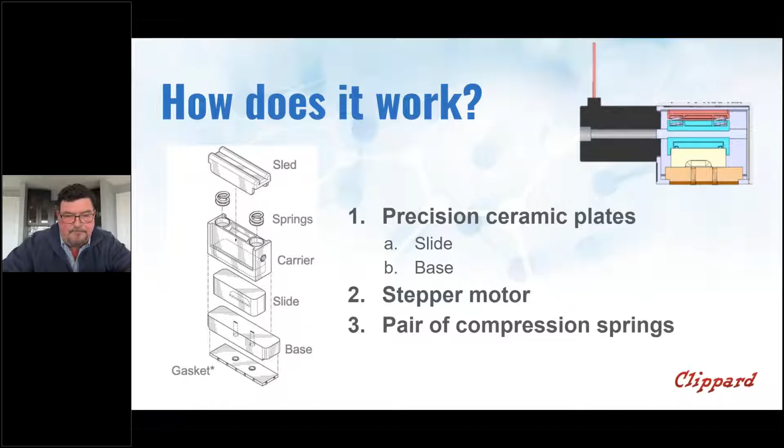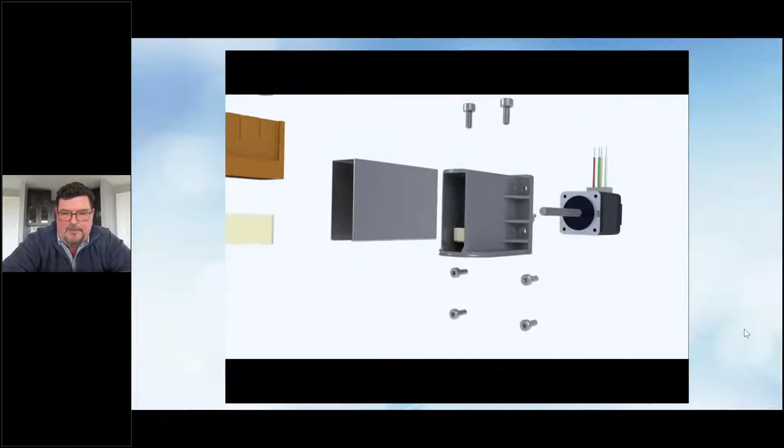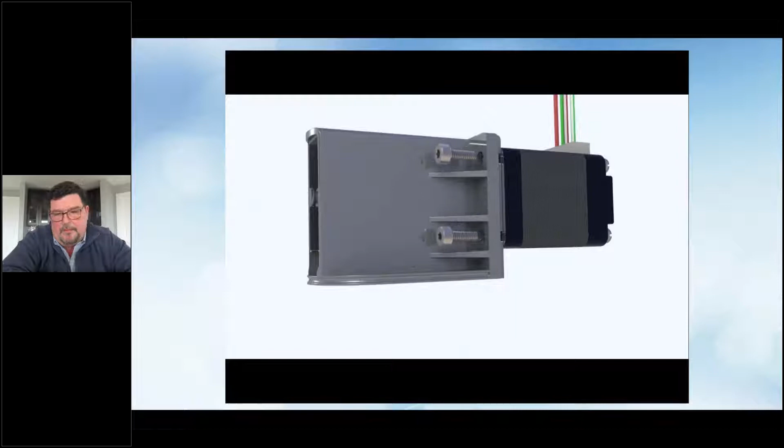Here's a short little video of basically how the Eclipse goes together. As you can see, we have the two ceramic plates. The base plate will be sat in and fitted in, and then the stepper motor will come in and actually attach to the carrier assembly. That carrier assembly, or the nut, would be actually holding the upper slide, and then we'll hold the compression springs in there and have a nice little fit into the overall housing.

So what's happening inside? We have a product that's called the SCPV, and that is a stepper-driven needle valve. In this case, this is a stepper-driven variable aperture valve. Basically, I am varying the size of an orifice based on these sliding seals. As you can see on the isometric view to the left, the plates are in the home position, fully closed. And as I said, you could use A or B port as your supply, but in this case, yellow is going to be our supply.

Now as I go into the overview, number one is the same picture as the isometric view to the left, but now I move into number two, and I'm starting to give the motor a command. I'm actually starting to step out and move. And the great thing about our flow paths, they have rounded ends. And so as I'm transitioning across the plate, the two rounded edges start to overlap or eclipse.

And so now I'm able to, in a nonlinear fashion, vary the delivery of the gas or the fluid into the circuit or downstream control environment. That's a nice little soft start option. And as we get further into this, you'll see that you're able to control the rate of that soft start. As we move further into the rectangular section of the flow path, we get into a more linear flow control of the output flow until we get to a fully open position.

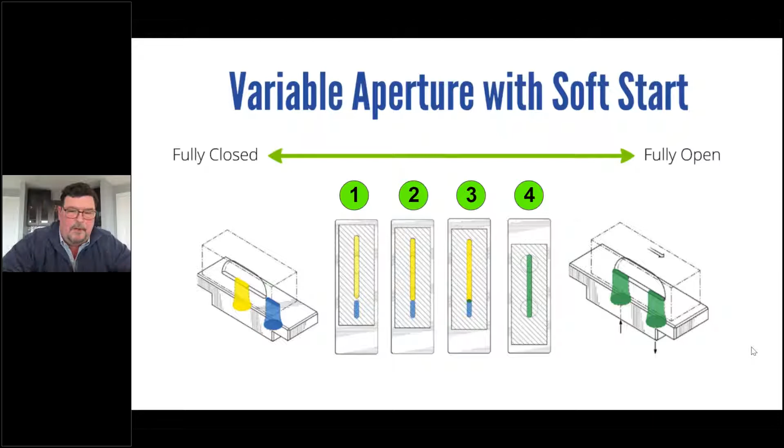So the Eclipse stepper motor is a bipolar hybrid stepper motor. It's kind of like a brushless DC motor, but instead of continually rotating, the revolution is divided into an equal number of discrete steps. This motor is actually capable of doing 200 steps per revolution. We chose the Haydon Kerk size NEMA 8, and this motor gives us a 1.8 degree step angle.

And by going this route, we're able to provide 60 millionths of an inch position change per step. Now that's in full step mode, and we'll get into what we can do micro-stepping wise, but in full step mode, each step will provide 60 millionths of an inch incremental change. As you can see to the right, the way the motor works is I'm energizing and de-energizing magnets to create a rotation internally, to the point where I'm able to make position changes of 60 millionths or better.

To make this Eclipse work, I need to have two components. I need to have a bipolar chopper driver. Our SCPVD-1 is something that we offer as a convenience. It's going to take the signal and chop the information to the motor, but I need to be able to give the motor a command, so I need the PLC as well. I'm pulse width modulating a 5 volt signal, and I'm going to need both of these to make it work.

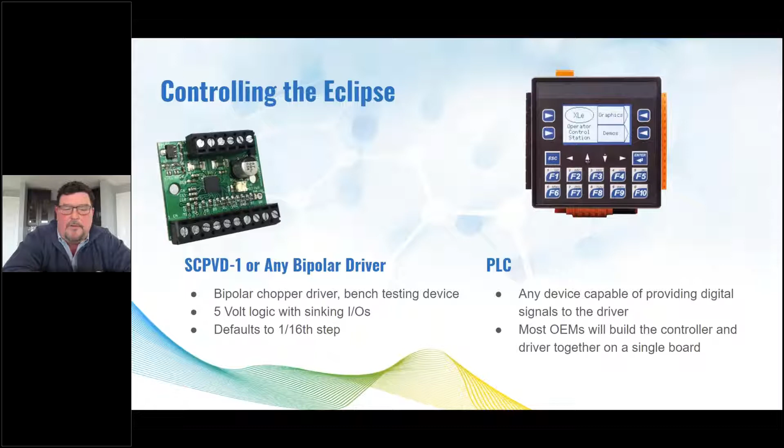But we offer the bipolar chopper driver as a convenience simply because we know that you want to get the Eclipse and do the testing, but this is something we know you're going to design into your application. Typically, it's a lot less cost for you if you just design your own chopper driver when you're putting this into equipment that you're going to produce.

So what makes the Eclipse unique? The 4 things we'll talk about. The first one's soft start. Second one would be resolution. Third would be the flow path, and fourth would be the ceramics.

The soft start, I have a lot of familiarity with what goes on because of the different products that we manufacture. Here we have a straight line that we need to follow, and we manufacture 2 other products, the EVP and the DVP proportional solenoid valves. And when I'm working with those type of valves, I can get very good control. The more current that I apply to the valve, the more of an output flow I can control.

But because of the dynamics of that product, I'm putting current to the solenoid. I'm generating enough current inside so that I can have enough magnetic pull to pull my spring mechanism or my seal mechanism off the nozzle. When I do that, in a lot of sensitive applications, that jump or that initial momentum off of the nozzle creates some type of jump in your pressure or in your flow. And in a lot of applications, you can't have that.

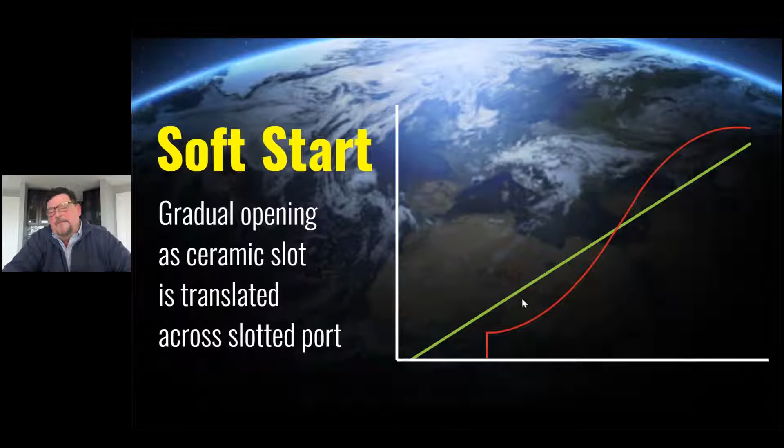So I'm very familiar with this section of the control of a proportional solenoid valve, and the soft start for the Eclipse. Well, because of the rounded edges of our flow paths, as you can see, we're actually overlapping, and we're truly eclipsing that flow path. We're able to vary that flow path at what rate you want to go with, and then it automatically gives you a very soft start, a soft introduction into the system downstream.

So next, we're going to talk about the UltraFine Resolution. I've already told you that the 1.8 degree step angle allows for each step to be 60 millionths of an inch incremental position change in full step mode. But now we need to talk about that we can actually micro step this. So I'm in full step, but I can micro step this down from full step to half step to quarter step, 8th step, and then a 16th step. And by going to the 16th step, we're able to tell you about this ungodly number of 3.75 millionths of an inch controllable. Well, I'll put it in a different perspective for you.

When we're microstepping, the Eclipse has an effective orifice of 20 thousandths, and I'm giving you in a full step 1,125 steps to modulate that 20 thousandths orifice. I go into a 16th step, and I'm varying the effective orifice of 20 thousandths, but now I'm giving you 18,000 steps to modulate that orifice. That is some very fine, ultra-fine resolution.

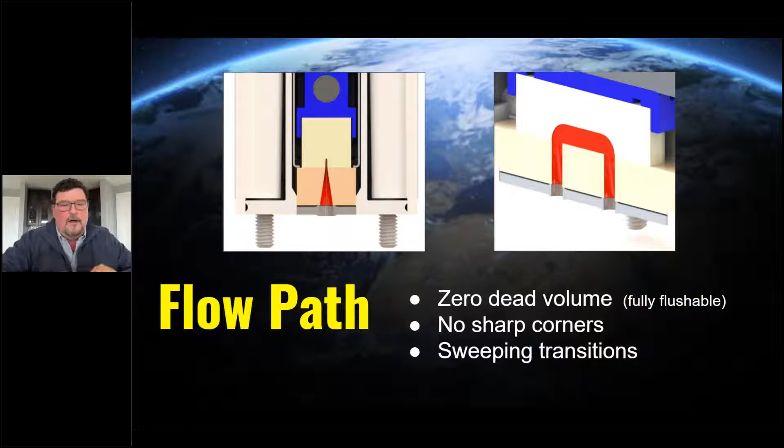Next is ceramics. First of all, it is ceramic, and it's an inert material, so it can work with a tremendous amount of different gases and fluids. The amount of time and effort that went into figuring out the precision molding and the geometry of the flow paths is basically what makes this a very smooth product for you. The lapped surface finish, we're sliding across the surface, so obviously that's going to be a concern when we're working with different fluids. What kind of life can we get out of this? And so a lot of design work went into figuring out the right makeup of the ceramic plates.

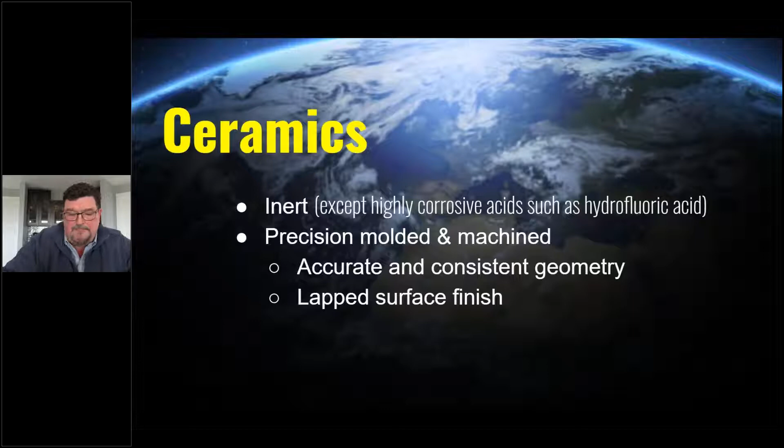Here's a little video that's going to cover just some basic operations of the Eclipse.

I think, Rachel, are you going to put that on? I don't have access to that video. Guess not.

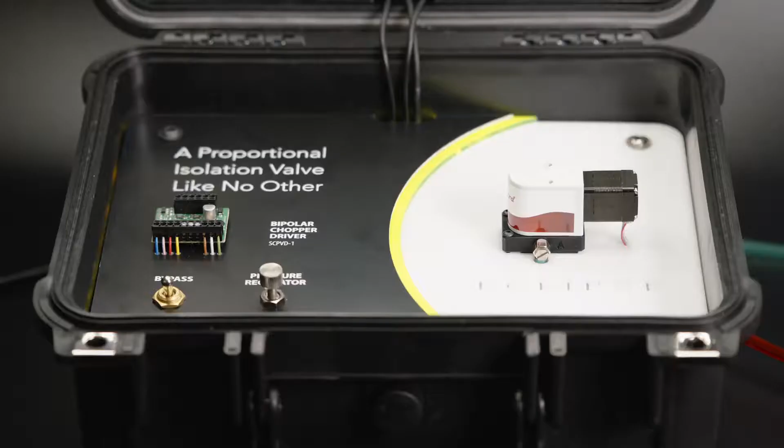Here at Clippard, we've created this really cool demo. It's a user-friendly type of demo for our Eclipse, and it basically utilizes our driver board, our regulator, the Eclipse, and a nice touchscreen. I start in full mode with 30 psi as my supply, and all I'm really doing is generating a curve from fully closed to fully open in the different microstep modes.

As you can see, the demo automatically rescales the graph to accommodate which microstep function I'm in. A nice function of this demo allows the user to record multiple graphs on the same screen for comparison purposes. I can change any parameters, and as long as I actuate the repeat tab on the display, all prior curves stay displayed for comparison. It's a nice little option when you're changing the parameters and you want to see how the performance curves marry up from one curve to the next.

As I finish this segment in that 16th microstep mode, you can see it takes a bit of time to get through the 18,000 steps. I would have preferred to speed this up to 6,000 steps per second, but unfortunately the demo only allows for the speed to be increased to 2,000 steps per second.

Our next set of performance curves is simply to command the Eclipse to go to fully open and back to fully closed. Very simple operation, but I'm using half-step microstepping mode. And the only difference with these curves, as you can see the performance happening here, is that I'm making incremental changes to the supply pressure in 5 psi increments.

Here I'm changing my supply pressure, and basically I'm doing the repeat function as I did before, and I'm recording all the different performance curves right there for you to do your comparison. Again, all I'm doing is hitting the repeat tab and keeping all my curves readily available there.

So can everybody hear me? All right. So what are the applications? We're going to go into, as I said before, the area. Let's see here. I'm sorry? Are we good? All right. Sorry about that, guys, but this is live.

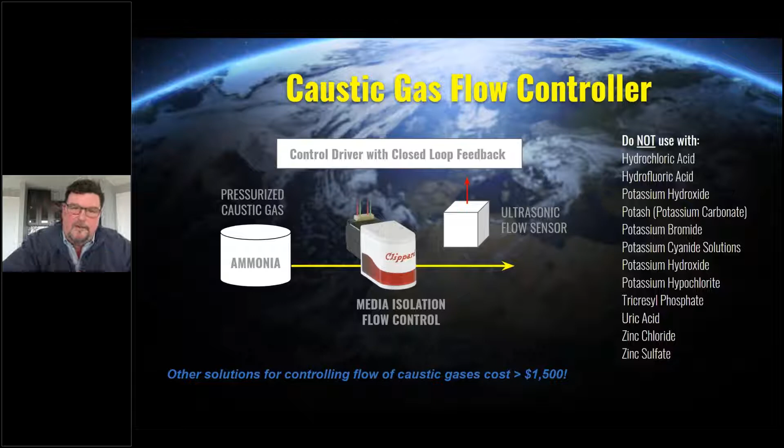Right out of the gate, as a standard component, the Eclipse can work with ammonia, no problem whatsoever. And applications like gas chromatography, where they do the delivery of ammonia in some applications, this is a great product for that.

Ultra low controllable range. Look at these different companies that we have worked with. I've done a lot of work with DNA sequencing, gas chromatography, flow cytometry. Basically, I've talked to you about the microstepping. In full step, we're generating each step 60 millionths of an inch incremental position change. And now we were able to microstep it down to 3.75 millionths of an inch, giving you the ability to vary a 20 thousandths orifice 18,000 times.

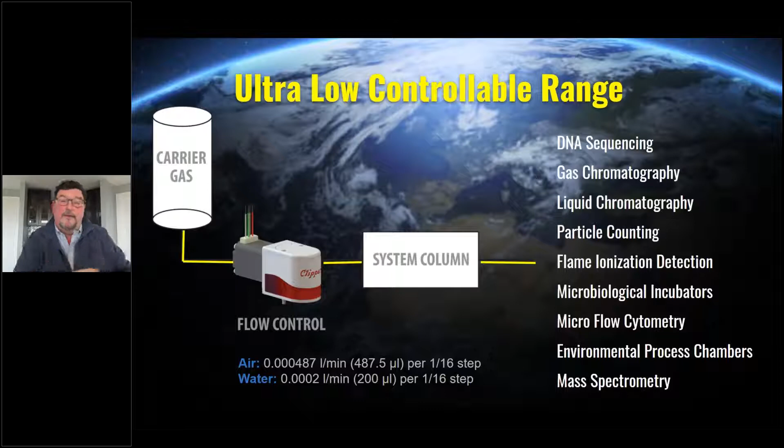So what do you need in the application? What kind of delivery do you need of the fluids? Do you need to deliver it? Do you need to draw it? It's up to you, but let us know what you need.

The power savings. So we didn't talk about this, but basically with the stepper motor, you're energizing and de-energizing the magnets inside the motor to get movement or rotation. And with the stepper motor, all you have to do is remove power and it'll hold its last position. So in applications where you want to get to a particular flow rate, remove power and just leave it alone. You're not building up heat, causing any issues with the heat, or using needless power to hold a position or to maintain a flow rate. This is an ideal thing for those types of applications.

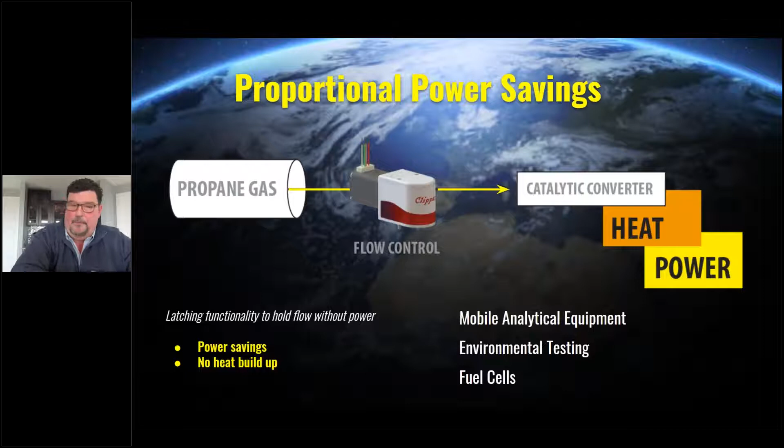And one of the products that we've manufactured, the Cordis product, is a nice electronic pressure regulator. It utilizes our manufactured EVP and DVP valves so that we're able to smoothly control pressure on the head pressure of maybe some fluid that you want to push through the system. You could use the electronic regulator to push it, or you could use the electronic regulator to pull it. Variable vacuum, right? I can draw through or push through.

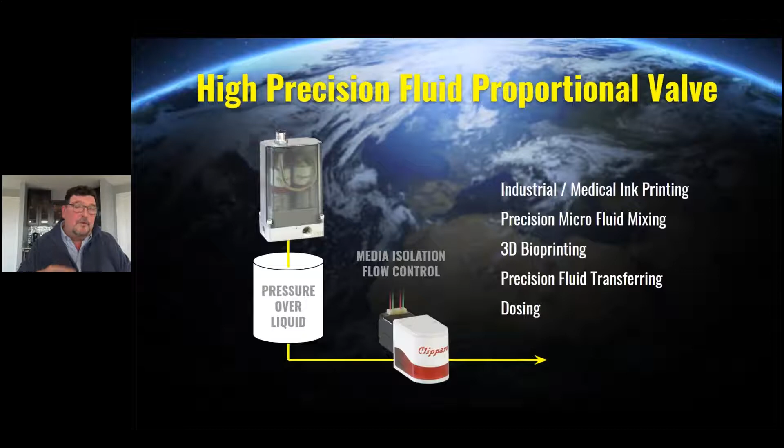A good application would be 3D bioprinting, extrusion printing. I'm pushing a fluid through. I'm using the Eclipse to actually control the rate that I'm feeding this fluid out. It's a very nice control package when you want to close the loop around precise delivery of different fluids.

The soft start, open and close. I've touched on this multiple times throughout this review, but really, because of the eclipsing of the flow paths, you're able to deliver your sample into your environment as softly as you want. I've been in a lot of applications where any disturbance whatsoever is enough to cause the downstream sensors that you're utilizing in your circuit to be unstable. They freak out for a little bit, and it takes a few seconds for them to calm down.

The soft start function of the Eclipse eliminates that. You're able to control the delivery into your sensitive system. You don't have to worry about damaging the samples, you don't have to worry about disturbing the downstream sensors.

High resolution vacuum. I was just recently working on an application, and quite honestly, I was a little bit surprised at how well we were holding deep vacuum. I wasn't really given the whole details of the application, but what they are doing is pulling a vacuum in a chamber and then utilizing the Eclipse as a vacuum break. But that vacuum break is with different types of gases, both hostile and inert.

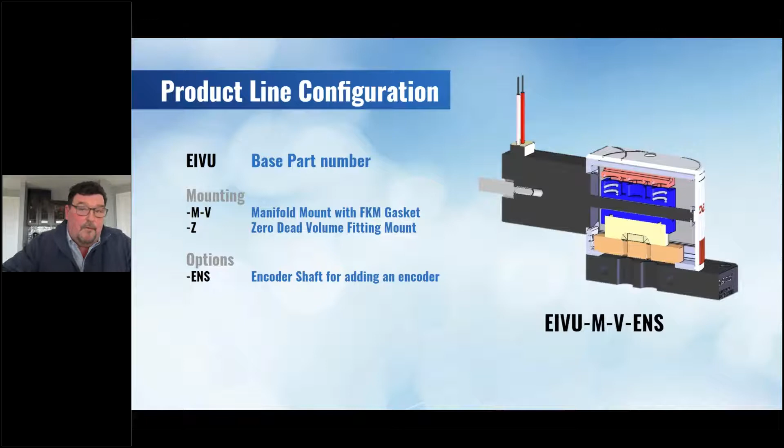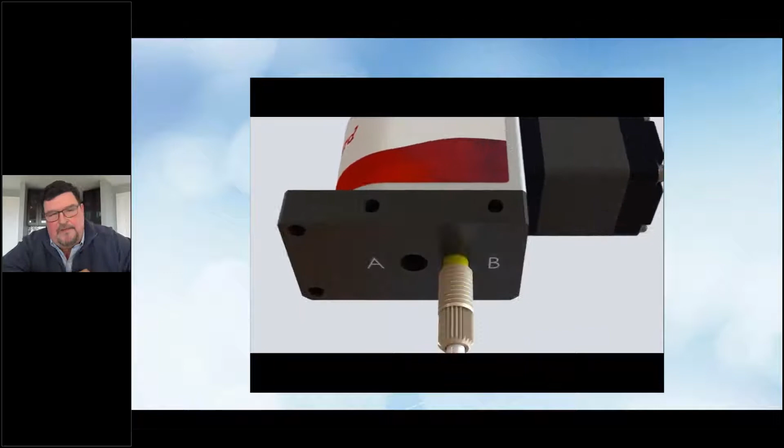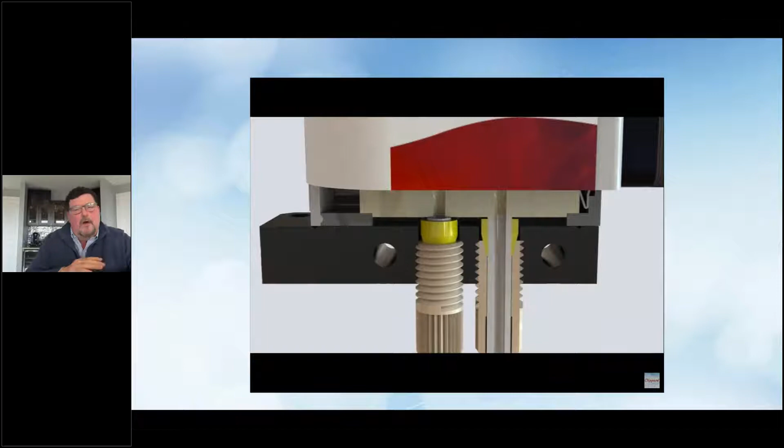Here's a video, a little animation of how the zero dead volume fittings go together. As you can see, we get rid of the FKM gasket seal. We're going to use the aluminum manifold or a manifold to help guide the zero dead volume fittings in. They'll make contact with the base ceramic plate. And as you can see by the cutaway here, as they make contact with the base, they provide no lips or no ledges and maintain a fully flushable flow path.

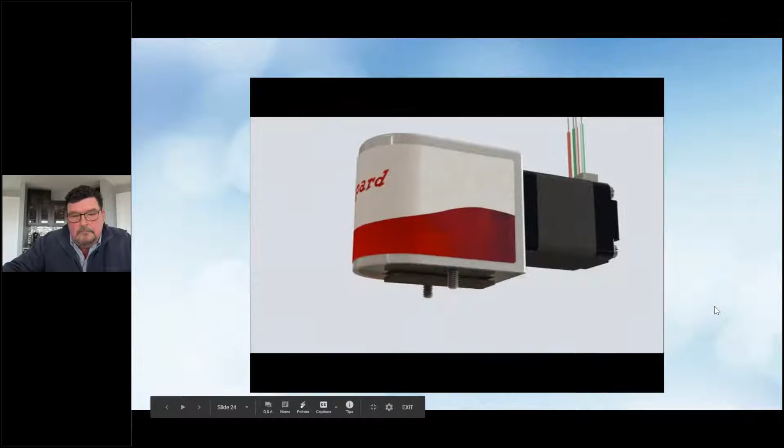So the top 10 features I want you to walk away from, at least thinking about some of them. The first one is that it's a stepper-driven proportional isolation valve. That's a nice thing to be able to say about a product. We're able to take your nasty little fluids and gases and give you very, very fine resolution control of flow.

It is bidirectional. It doesn't matter whether you're putting the pressure to A or B ports. It's a very versatile product. It's rated for both gas and liquid. You know, we have some limitations because of ceramics, but ceramics as a whole is very inert and can work with just about 90% of all the things that we need to be able to control flow of.

It is rated from vacuum to 30 PSI. We've worked with higher pressures. I've had it up to 40 and 50 PSI with no issues. However, the rating on this is vacuum through 30 PSI. If we need to consider higher pressures, we'll need to know the specifics about the application, and it might be just as simple as changing out the compression springs to afford that higher pressure.

It's leak-free up to less than 0.05 SCCM. We 100% test every valve that we manufacture here at Clippard, and when we say that it's less than 0.05 SCCM, we mean that because we're not going to pass the valve if it hits 0.05. We want it to be below that. So we're very comfortable that when you get a valve, it will be leak-free to at least that level.